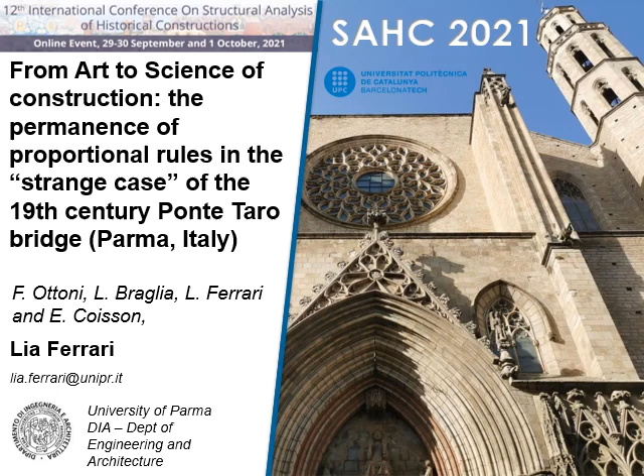My name is Lia Ferrari and I'd like to present you a paper titled From Art to Science of Construction, the Permanence of Proportional Rules in the Strange Case of 19th Century Ponte Taro Bridge, Parma, Italy.

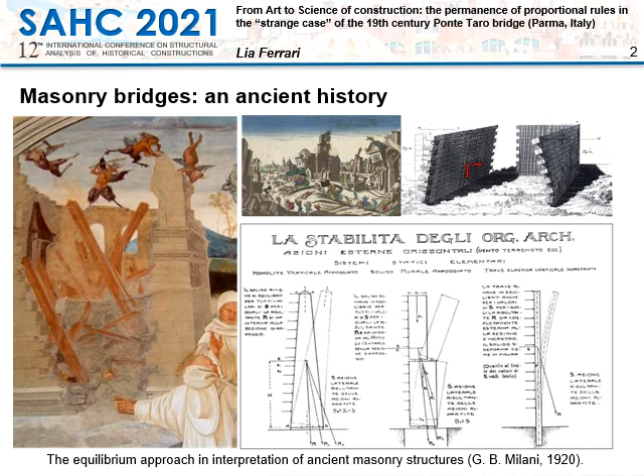The application of the proportional theory is particularly interesting in the case of bridges, which bring together dimensional issues with technical construction problems. In this regard, the size of pillars represents a central theme, since they must have the right thickness to resist the thrust of arches and, at the same time, to allow the passage of water.

So, if we consider the dimensional prescription for bridges in terms of walls or piles thickness compared with their span, we can notice the permanence of similar dimensions over time. The progression of these structures is indeed more evident in the technology used for building. Leon Battista Alberti declared, for instance, the importance of reinforcing the filling of vaults and of using large-sized blocks to ensure masonry stability while reducing the pile thickness for hydraulic efficiency.

Therefore, only the occurrence of both the respect of ancient dimensional rules and the use of proper technology in the arrangement of material and in the wall construction can constitute a reliable qualitative method for expeditious stability analysis of historic bridges, thus anticipating the result of further limit analysis.

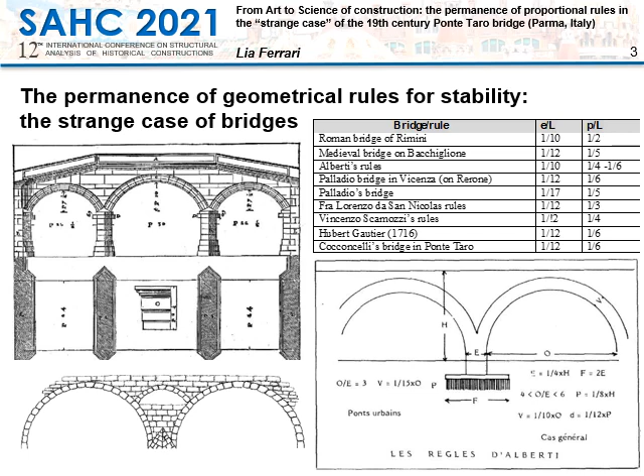The case study of Ponte Taro Bridge near Parma in northern Italy is here presented to show that on one side the respect of proportional rules can be a first guarantee of stability, and on the other side the non-respect of technological prescriptions central in the bridges could be the cause of damage.

The bridge is a very important monument both from cultural and strategic point of view, and moreover it is an interesting case study not only for the technical and structural issues related to its restoration and use with increased traffic loads, but also for the role that geometry played in its history and stability.

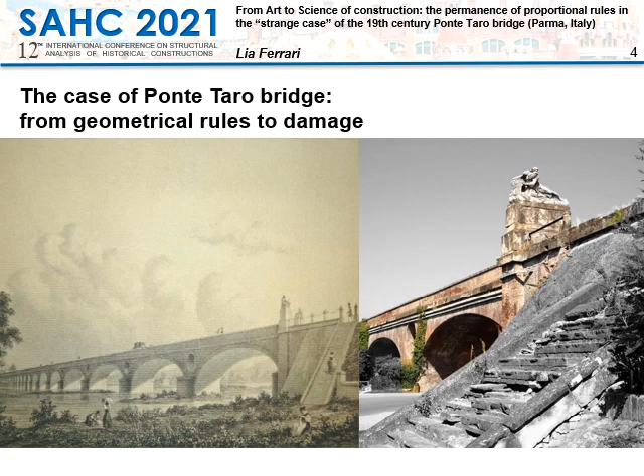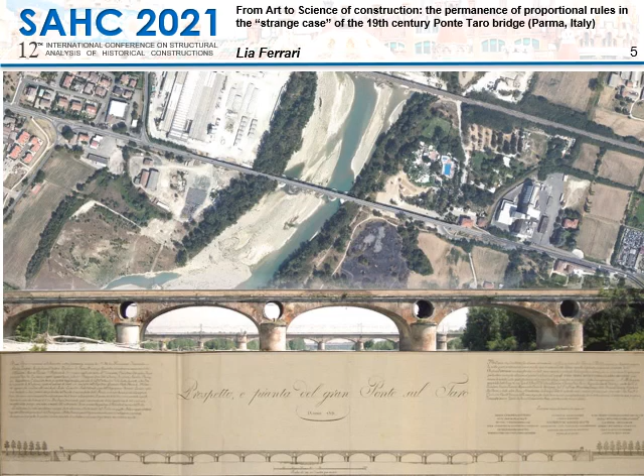The bridge was commissioned by Maria Luigia, Duchess of Parma, and it was built between 1816 and 1821, according to the design of engineer Antonio Cocconcelli. The original configuration was composed of 17 arches, but after a flood in 1818, it was modified, adding 3 arches and deepening the foundations.

So, the final bridge consists of 20 centered lowered arches with 24 meters span, supported by rectangular pillars rounded on the short side to reduce water impact. The pillars lay on timber posts as foundations. Oculi have been inserted above each pillar, easing the outflow of water, whereas the external brick structure unfolds an internal filling of river cobblestones mixed with mortar.

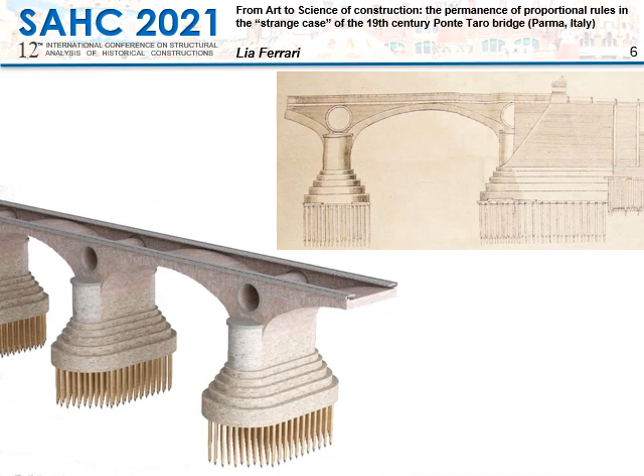Nowadays, the bridge is still in use, although it is too narrow for the modern traffic requirements, not ensuring a safe passage. The upper parts, especially the roadbed layers and the lateral walls, have undergone several works in the last decades, as well as the bottom foundation elements that were consolidated to improve their stability with regards to the water flow actions. Conversely, the conservation problems of masonry arches have been rarely faced in the past, and now their poor condition worries about possible structural problems.

So the current decay phenomena of the masonry surfaces were mapped on the photogrammetric surveys, and the uneven distribution of these decays suggests meaningful indication about their possible origins.

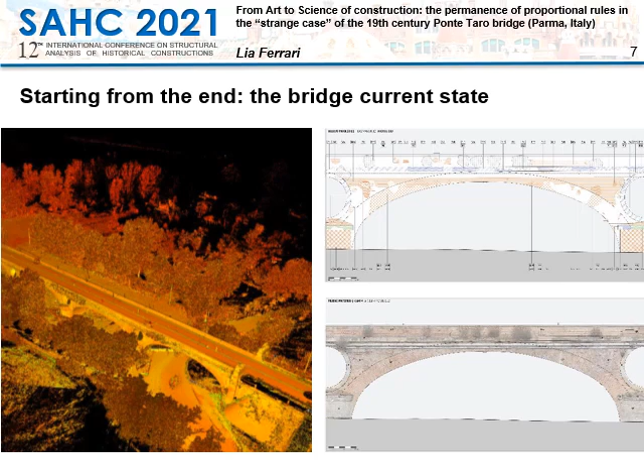Widespread efflorescence is present at the intrados of the walls, probably due to de-icing salts percolation in the inner part of masonry because of the ineffective drainage system. Moreover, missing or detached parts of masonry have been identified at the edge of the vault and the arch front elevation. This disorder could be related to the brickwork disposition, possibly worsened by structural stress concentrations.

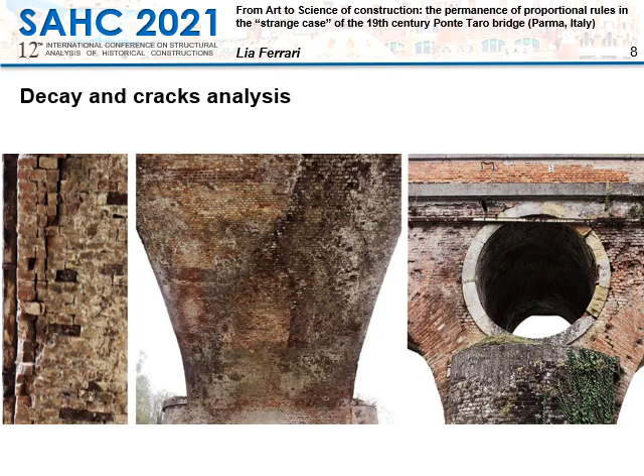Furthermore, some cracks have been detected. Some of them are clearly due to reconstructions carried out after World War II or car accidents, whereas some other fractures seem to be related to the typical depressed three-centered arch mechanisms or to different settlement of the walls.

So, to verify this hypothesis, the present geometry has been analyzed, searching for differential settlements both longitudinally and transversally to the bridge. Actually, comparing the pier top levels, the differential settlements turn out to be quite limited, and this data, in compliance with the result of geological tests, proves the effectiveness of the previous underpinning intervention of the central pier's foundations.

On the other side, the arches instead show more significant deformation. Therefore, the current survey and the original design shape deduced by Cocconcelli drawings were compared, and 7 out of 20 arches highlighted a lowering of the keystone higher than 30 centimeters. This value seems to be due to further movements occurred after the physiologic lowering of arches during the centering removal in the construction phase.

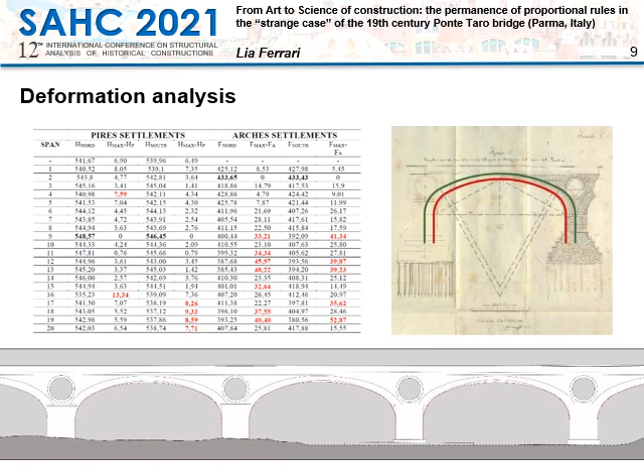To evaluate if the longitudinal cracks could be connected to some torsional effects, a further comparison between the levels of the keystone in the north and south arch of each span was performed. Most of this inclination proved to be southwards in the west side of the bridge, changing northwards in the east one.

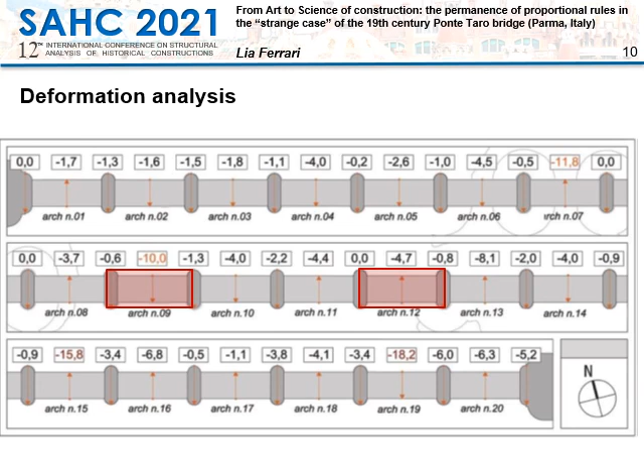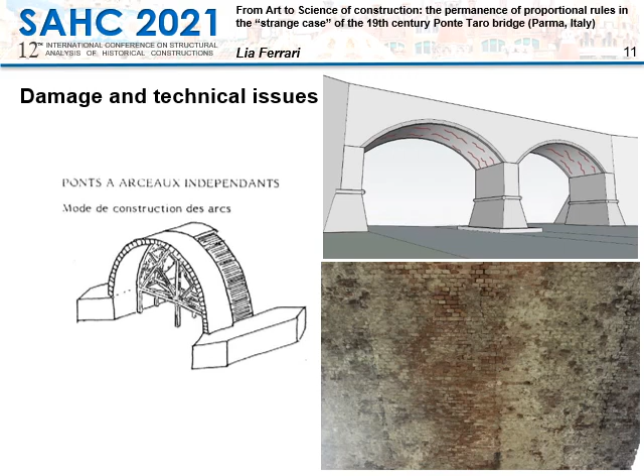So finally, comparing the crack pattern and the deformation analysis, it is possible to find a correlation between the fractures and the settlements only in 2 arches, those highlighted in red in the present slides. This fact leads to speculate that the damage is not structural but more probably linked to local mechanisms ascribable to as many defects during the construction phase, particularly significant in the case of bridges with independent arches as the case study.

To verify the stability by means of a simplified and qualitative approach, an integrated analysis of the historical proportional theory and the constructive features of this peculiar masonry bridge was carried out. First of all, the adherence to the prescribed proportional rules, recalled at the beginning, was verified to ascertain the respect of Cocconcelli prescription for the ratio pile-span equal to 1/6, as shown in the figure in the lower part.

Actually, what we can notice is a slight license in the thickness of the arches. The engineer here applied a smaller ratio than the one prescribed by treatises. These advancements were made possible thanks to Méry's method used by Cocconcelli for designing the bridge. So, recovering this graphic analysis, it was verified that the curve of pressure is all contained in the middle third of the arch thickness, thus guaranteeing the best behavior for masonry.

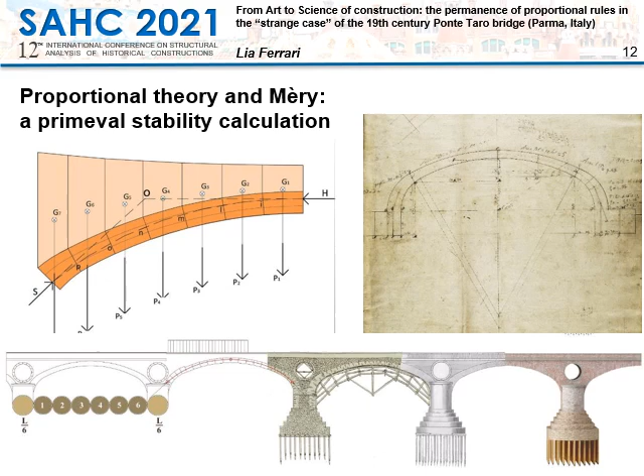The same result has been obtained by applying simplified limit analysis to the wall arches, as shown in the left image. The safety factor, intended as the ratio between the thickness of the arch and the minimum one to contain the pressure curve, was found to be well above the collapse limit stated by Heyman.

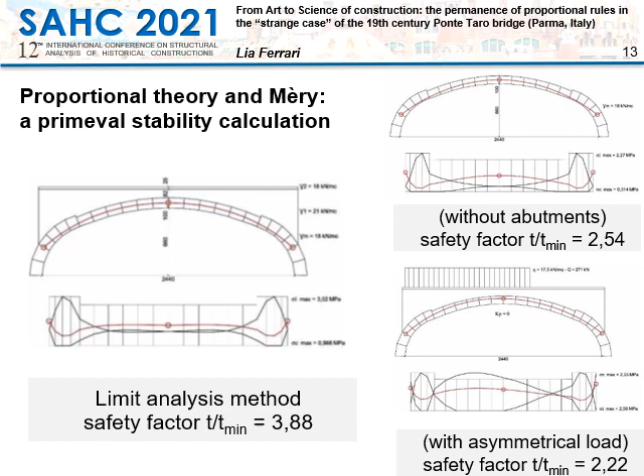Further simulations were performed with worse conditions. Firstly, considering the arch itself without the abutments as shown in the upper right image, and then adding an asymmetrical load in the right bottom part. In these cases, a sensibly lower safety factor was found, however far above the minimum required for stability. So, the case study shows a surprisingly high load-bearing capacity despite the load having significantly increased over time, thus definitely confirming the reliability of Méry's graphic method.

In conclusion, we can see the history of constructions as the translation of structure into geometry. The shape of ancient buildings used to be the formal result of an empiric calculation. So with this, a specific interpretation of the geometrical survey data can represent a powerful tool for the comprehension of the present structural condition, as well as a precious element for the validation of any further numerical models.

Moreover, retracing and recovering the principles, both dimensional and technical, which governed the design and the construction of these ancient buildings and infrastructures, can be considered the first step to reliably interpret, even if in a very simplified way, their current damage and residual behavior, which is the first condition for setting up an effective strategy for structural strengthening.